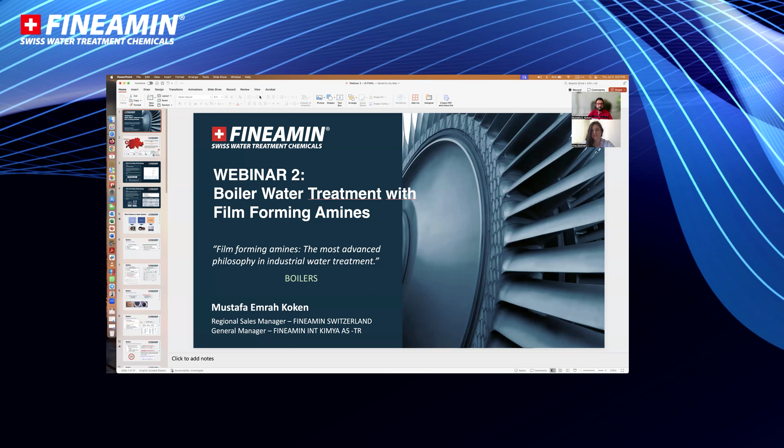And just let me start by showing you the so I think it is all clear, right?

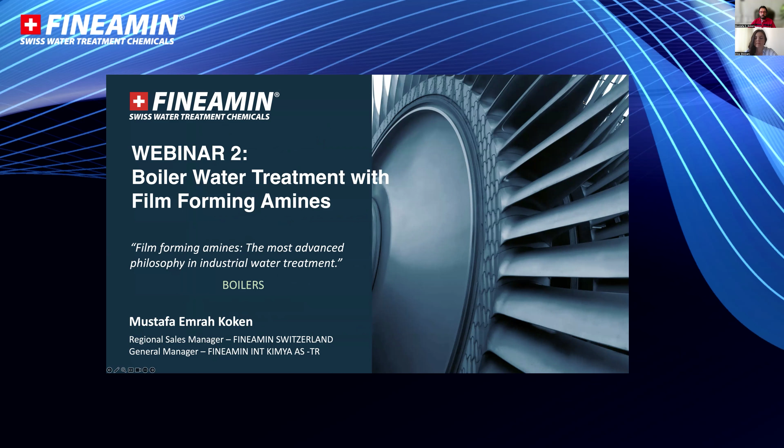So we will be giving a focus to boiler treatments, and first let me say something about our company, as Irina mentioned, and for those of you who participated in our first webinar, there will be some slides that look similar as we try to compare the standard treatment and the film-forming amine-based treatment. Once again, when I'm pronouncing film-forming amine, some people say film-forming amine, we also say polyamine, or we also say FFA. Basically we are all meaning the same.

We are a Swiss company, making our production in Geneva, and we have offices in different locations, like Germany, Turkey, Singapore, Mexico, and Brazil. Our products are produced principally in Switzerland, but we also have local production in Turkey for the Turkish market.

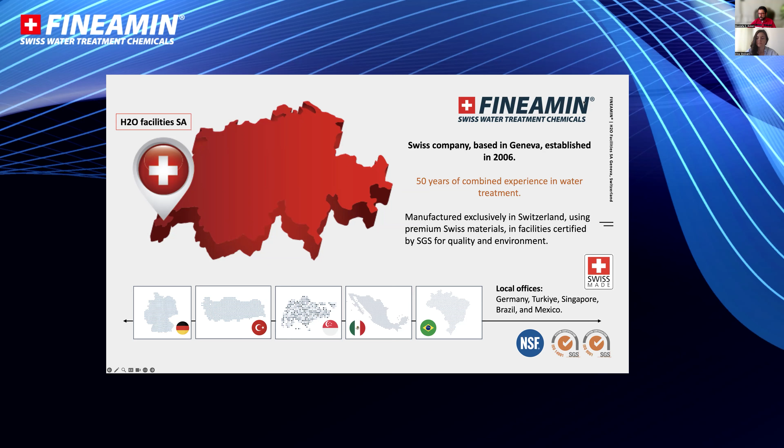This is basically a journey of more than 50 years of film-forming amine-based treatment chemicals supplied by Fineamin philosophy. As we will be taking into consideration certifications too, you'll see once again that we are certified by NSF, and also have ISO 9001 and 14001.

So let's start once again with the basic understanding of film-forming amine technology. We are talking about formation of a monomolecular film on the metal surface with hydrophobic nature. The hydrophobicity generated on the metal film, precisely the metal oxide it is adsorbed onto, will repel anything hydrophilic like dissolved gas and dissolved solids. So this will act as a continuous barrier between water and metal.

Although there is much more popularity about film-forming amine treatment nowadays, the history of film-forming amine substances dates back to the 1970s.

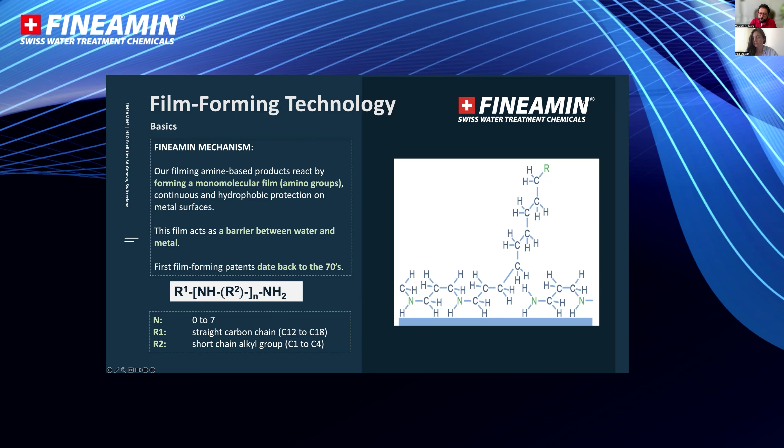For those of you interested in the molecular structure, this is a really bulky molecule with different alkyl chains, R1 and R2. The intermediate group will also define something - for example, if N is 0 and the first alkyl group is C18 hydrogen 37, we are talking about octadecylamine, ODA, one of the first known film-forming amines in history, I would say. There are more than one film-forming amine substance, and we are also using ODA in our formulations.

So the idea is seeing it from different perspectives: first, adsorption on the metal surface, followed by interaction between hydrophilic heads that is ionic, and then there will be van der Waals forces between the tails, generating hydrophobicity. Of course, that film form will not be affecting thermal exchange, so there is no contribution or energy loss because of that.

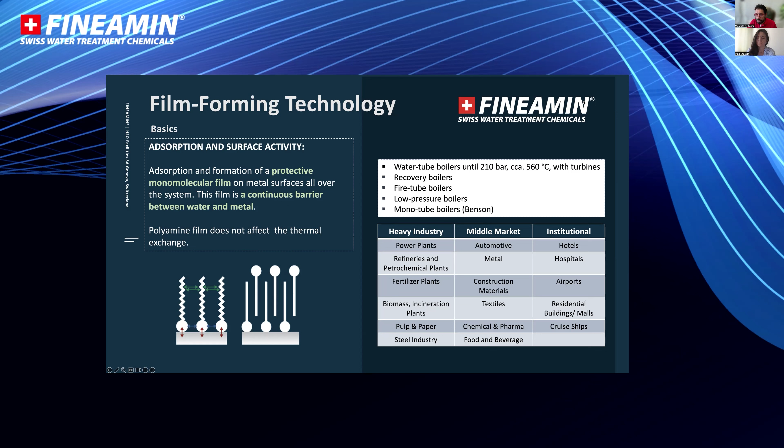In boiler applications, we are using quite a different and very wide range of places - in terms of the type of boilers, water tube boilers, recovery boilers, fire tube boilers, as well as different industries, whether heavy industry, power plants, refineries, fertilizer, middle market production, construction, textile, automotive, food and beverage, as well as commercial institutions like hotels, hospitals, airports, etc. So it is really wide applications.

When we are focusing on applications for boilers, we are targeting treatment in order to overcome problems associated with scaling, corrosion, and carryover. So these are the three technical scopes.

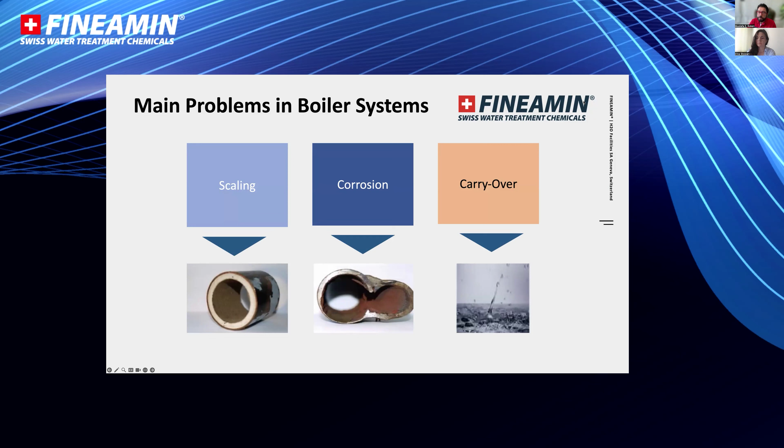Normally in traditional treatment, people are using oxygen scavengers of different types, dispersants, phosphate, ammonia, or neutralizing amine mixtures. Of course, the treatment is being selected with respect to system data, the boiler pressure, etc.

With respect to that traditional treatment, when we switch to the film-forming amine-based treatment, we are using basically mixtures - all organic one-drum solutions, and mixtures, all organic two-drum solutions, composed of different actives.

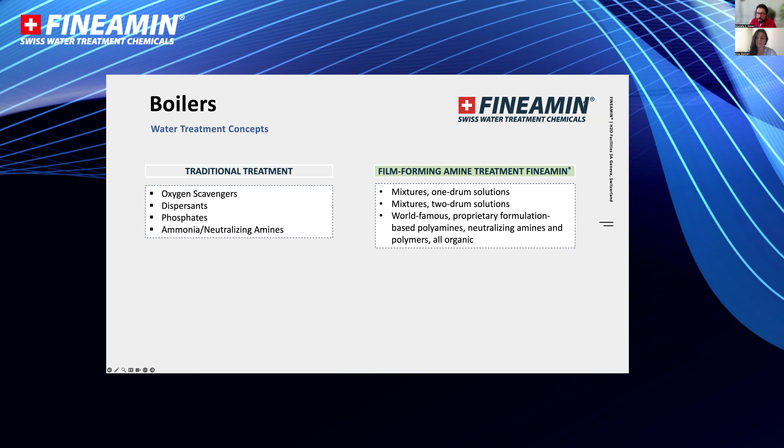So the core is film-forming amine, also known as polyamine, but of course the formulations also contain pH-boosting agents like neutralizing amines, and up to certain pressures, also polymers.

As we said during our first webinar for the boiler treatment case about the oxygen corrosion issue, we are mostly dependent, in case there is a deaerator, on the external method, meaning mechanical removal of the dissolved oxygen. At the same time, it's possible we have an economizer in case the condensate return rate is low, or for the process usage of the steam, and the steam may be becoming dirty after the return. So people just throw it away and use an economizer to heat boiler feed water.

These two methods are helping a lot because the solubility of the gases, including dissolved oxygen, is inversely proportional with the temperature. So the higher the temperature, the more oxygen we remove.

But in case of some low pressure boiler industries, there is no deaerator, which means there is no possibility to remove the oxygen mechanically, and instead we are solely dependent on the chemical.

Now, in order to get the real performance and benefit from the chemical, we need to know exactly the boiler feed water temperature. Why? Because the boiler feed water temperature directly tells us about the dissolved oxygen concentration. If we are not taking it precisely, we will not be able to read any oxygen scavenger residual.

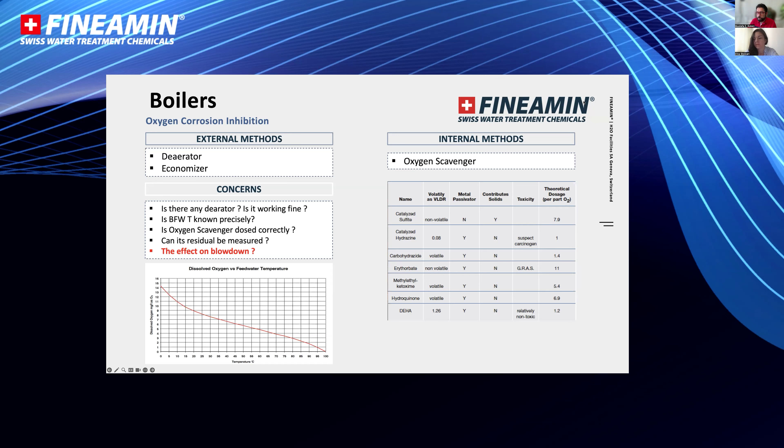So this is always a back and forth evaluation, and it gives us pain because at the end of the day, if we are unable to remove oxygen properly, we will have oxygen-related corrosion, not only in boiler feed water lines or in the boiler, but also oxygen is a gas - it will go to the steam and generate pitting also in steam and condensate lines.

So why are we talking about this? Because in Fineamin products, we don't use any amine sulfite or oxygen scavenger principally. So whether the temperature is low or high, we will not be changing the dosage of our chemical.

The most preferred internal treatment chemical is phosphate and polymer mixtures. In low pressure cases, most people are using inorganic types of phosphates. Because calcium phosphate is much less soluble than calcium carbonate, in case of any hardness slippage to the system, it will convert into calcium phosphate form that is soft and removable even by jet water cleaning.

However, for an extended precipitation of calcium phosphate over the metal surface, especially when we also have relatively higher pressures, we'll be generating problems about the heat exchange. This will generate steam blanketing, overheating of the tubes, and then tube ruptures. So at the end of the day, phosphate is not as innocent as it is thought to be.

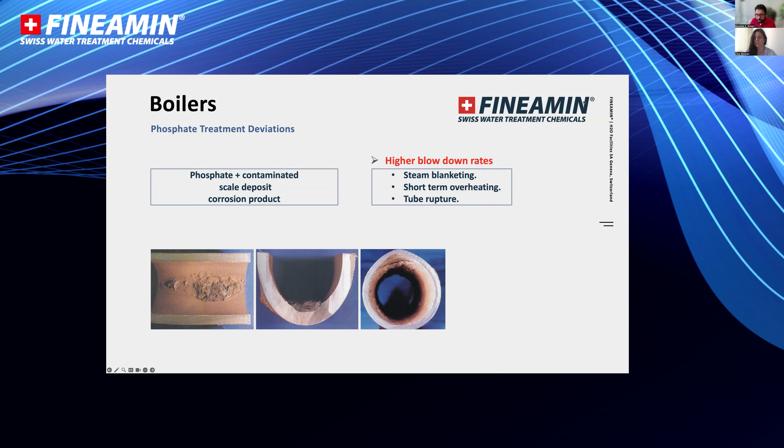And when we go to high pressure applications, the phosphate treatment is a bit more complex. We are not using trisodium phosphate or anything like this, but rather we use a program called coordinated phosphate treatment - basically two-type phosphate in correlation with the pH.

But what happens is that in case of change in load during startup conditions, or because of process demand, or if we have some refurbishment of the boilers or burners, fuel change, fuel-to-oxygen ratio change, etc., we may face a problem called phosphate hideout - meaning we are dosing the phosphate, but we are not measuring the level that we dose. This is the hideout condition, because phosphate is precipitated.

Because there is an equilibrium reaction between phosphate and pH at that instant, while the phosphate is not measured to the level that we dose, the pH is measured more than we dose. So when the return conditions happen, meaning the system is stabilized again, we start to read more phosphate than we dose because we are resolubilizing the phosphate precipitated on the metal surfaces. But because there's an equilibrium reaction between pH and phosphate, pH starts to drop. So this is really a very serious problem, and it is difficult to cope with.

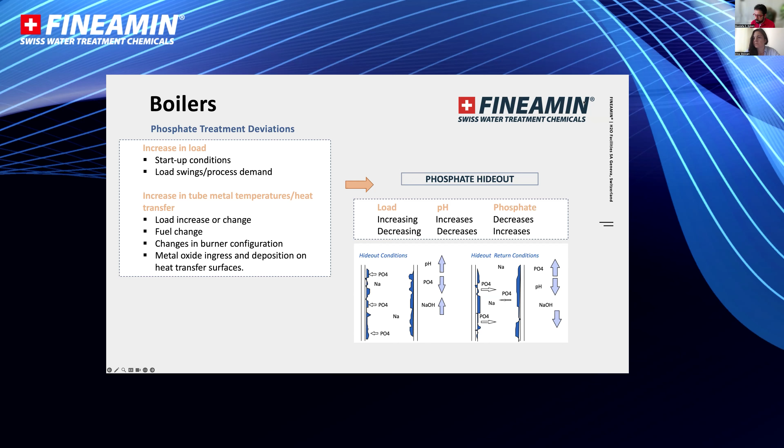Again, film-forming amine-based treatments like Fineamin do not contain phosphate. So there is no possibility of having phosphate-related issues, including phosphate hideout.

Speaking of high-pressure cases, we are talking about oxygen scavenger issues. Historically, everyone knows, and it is one of the best technically, I would say, oxygen scavenger people are using hydrazine. From the technical perspective, hydrazine also decomposes to ammonia. Similarly, people said that we also have the health issue because hydrazine is known to be carcinogenic. So we can switch into a much more innocent molecule introduced into the market probably like 20, 25 years ago.

So it is carbohydrazide. But again, carbohydrazide basically has two issues. Number one, as part of decomposition, it will also decompose into ammonia. So if we have copper and copper alloys in the system, like the hydrazine case, it will be generating issues for corrosion to yellow metals. Not only this - carbohydrazide itself is the molecule, as a passivator, to work as an oxygen scavenger too.

However, between 135 and 200 degrees centigrade, it will decompose to hydrazine. So again, we are talking about hydrazine formation in the boiler, so it is also exposure to the environment. So basically, carbohydrazide also has such outcomes and undesirable points.

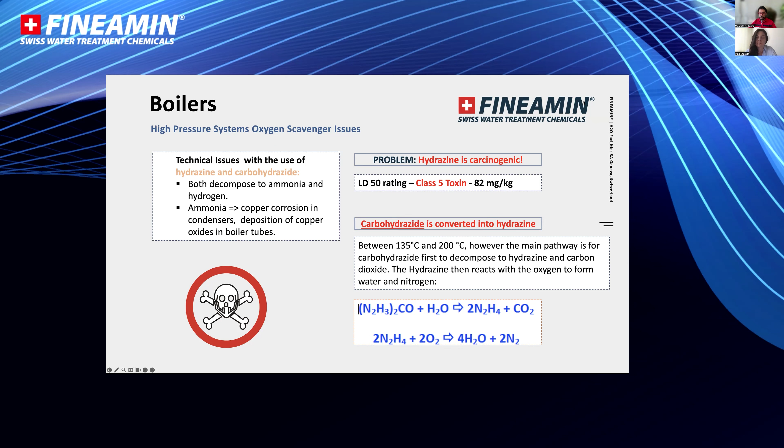So the third problem that we said about boilers is about carryover. This carryover is about steam purity. We may have mechanical carryover that is not depending on treatment chemical operation - it is mostly about the steam load and steam load changes.

However, the second carryover type, chemical carryover known as foaming, is solely depending on chemical treatment control. Especially in low pressure cases, if there is improper control of the blowdown, high pH, alkalinity build up, high levels of phosphates and other treatment chemicals, and so on, it may lead to foaming, and then boiler water in the form of small droplets will be transported into the steam lines, impacting steam purity and hence quality.

Again, why we are saying this here - because in Fineamin treatment chemicals based on film-forming amine technology, there is no possibility of chemical carryover because our chemical is all organic and contribution to TDS is extremely minimal.

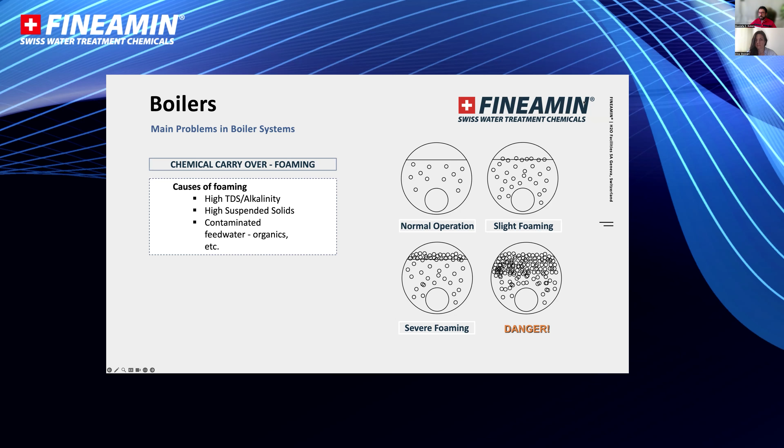So what we have been seeing as a comparison, just to give that summary again - basically no sulfites, no phosphates, no inorganic component, and no carcinogenic components. So we can ideally cycle up the boiler to the level we would like, depending on the limits of operation. We may have lower blowdown amounts, and lower blowdown means lower energy consumption, lower total water consumption, and lower total chemical consumption. So we don't have any carcinogenic, mutagenic components, so we will be fulfilling health and safety regulations for the workers and for the environment. This is the comparative study showing the positive points of Fineamin film-forming amine treatment.

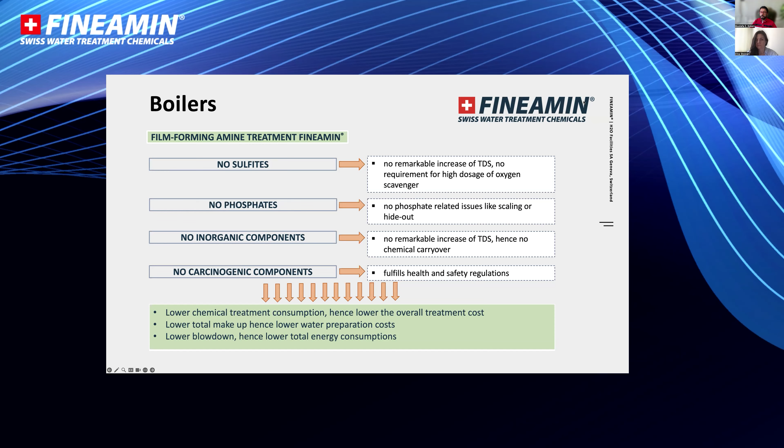So then another interesting part is about standby boilers. A customer may have more than one boiler, or one boiler with non-continuous operation. Definitely when someone is stopping the boiler, it means it has not been kept under pressure, but it is fully cooled down. So roughly within 2 days, corrosion will start. Why? Because the dissolved oxygen concentration will increase and it will attack the metal surface.

So then normally people should do the preservation. Again, the preservation is a bit different when it is up to a month, more than a month, and more than 6 months. So up to 6 months, wet preservation is possible, but up to a month, sulfite-based inorganic scavenger can be used. But if it is more than 1 month, it is not possible, because there will be too much sulfite converted into sulfate, which generates stress on the metal.

And if it is more than 6 months, we go with the dry preservation, like under the inert nitrogen blanket with desiccator inside, so on and so forth.

Now, the most interesting part of comparison for wet preservation by film-forming amine treatment of Fineamin is up to 6 days. There is no problem, and we can stop the chemical dosage, and the film formed on the metal surface will stay.

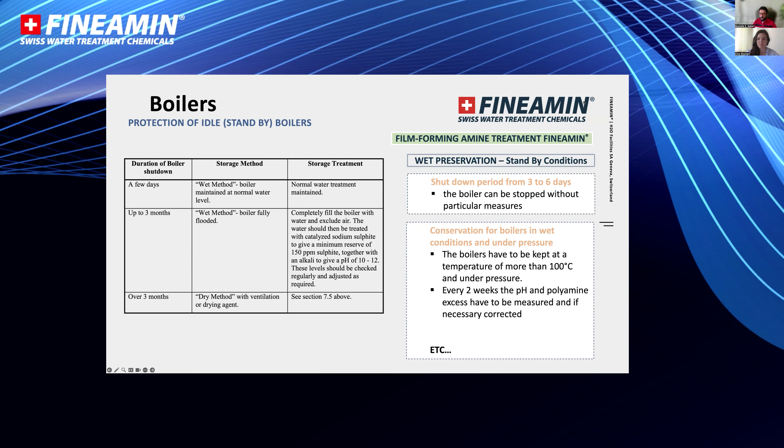And of course, when it is more than 6 days, we also have specific preservation procedures depending on the conditions of standby. However, those conditions and the chemical consumption are much more mild than the traditional method using sulfite-based preservation. So that is also another advantage of film-forming amine-based technology of Fineamin.

Now, the last part about the boiler treatment is for the boiling out. I will not go into details. This is totally a separate subject.

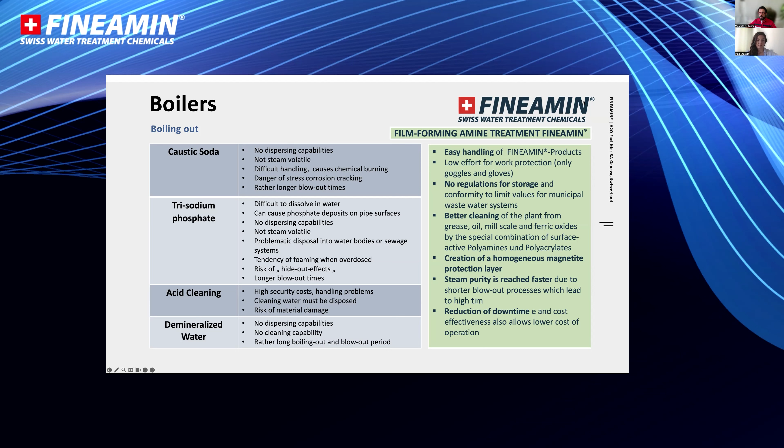However, when someone compares the film-forming amine treatment capabilities for boiling out, theoretically, we can say that it is possible to use the same treatment chemical to do a boiling out versus different options like using caustic soda, trisodium phosphate, demineralized water, sometimes acid cleaning for some people, and then definitely they have their own cons in terms of handling, storage, hazardous chemicals, dangerous chemicals, possible scaling, etc. So this is also a further application area in boiler treatment of film-forming amine treatment of Fineamin products.

Now, at the end of the day, what we are saying is that the treatment as the core philosophy has surface active film-forming amines, polyamines, meaning FFAs. But we are not talking only about the product that contains polyamines inside. We are talking about specialty mixtures that also have neutralizing amines and, up to certain pressure limits, polymeric dispersants that will really help.

And as I said at the beginning of the presentation, basically we don't need to use an oxygen scavenger. However, for certain clients, there is a key performance indicator value for dissolved oxygen.

So we are protecting the metal surface from oxygen corrosion by making a hydrophobic film that will repel dissolved oxygen, like the painting of a metal surface, I would say. But as you may understand, there is no stoichiometric reaction between the dissolved oxygen and the film-forming amine, as in the case of an oxygen scavenger.

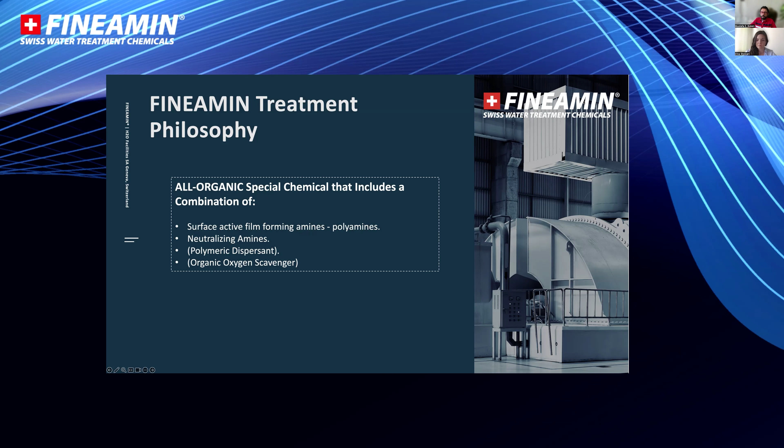So in the presence of a deaerator, the dissolved oxygen value will be at the level that the thermal deaerator can remove. So in case the client has a key performance indicator for dissolved oxygen, then we also use in certain products an organic oxygen scavenger to deal with that level. That is the only reason to have, in certain formulations, the presence of an organic oxygen scavenger.

So again, the philosophy in most cases is a single drum, because it is composed of different actives and different functionalities. But at the same time, as Fineamin, we also have a single drum of film-forming amine that we will discuss. And we also have solutions that do not contain cyclohexylamine for certain reasons, which we will discuss in coming slides.

And happy to say that for certain of our products, we have also NSF G6 or G7 conformity. So this is also about the requirements in case people are asking for direct contact with food, so on and so forth, that we can really supply.

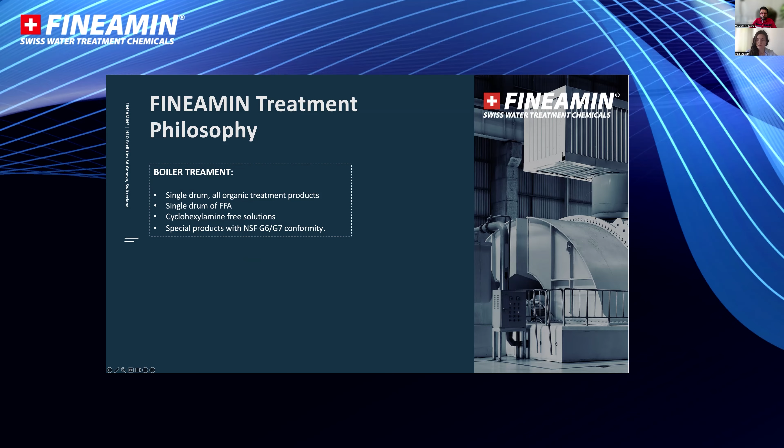So in Fineamin treatments, in specific cases like in a fire tube boiler using the Fineamin product, you can see the difference for better protective film formation and passivation. The top pictures show a client having an application of a traditional treatment, and then without any maintenance or shutdown period, cleaning and restarting again with Fineamin treatment, it was just switched accordingly. As you can see, in a course of only 6 months, there's a remarkable change.

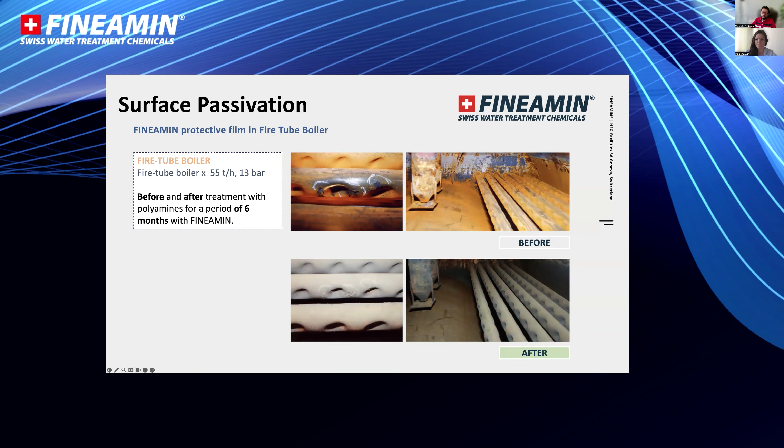And the pictures are from the same locations. You can see how the film forms and protects the surfaces. So this is a fire tube boiler.

And for the application of direct food contact cases in low pressure, again, you can see the change in boiler water conditions even after the first week, but over the course of only 3 months, you can see how it has been changing.

This has been expected because sometimes food industries have issues of seasonal work, then the steam load changes, the operation of the boiler changes, and there's an inconsistent level of oxygen scavenger because of this change of load. So the traditional treatment, unfortunately, has its own drawbacks and failures.

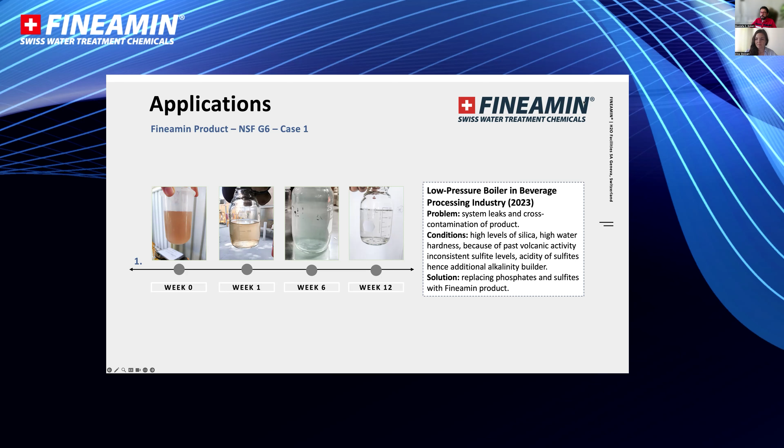While in Fineamin applications, the film is easily formed and kept intact all the time. So even for short periods of standby or changing, there will be no change of Fineamin product dosage, and irrespective of dissolved oxygen concentration, we are not changing the application pattern.

This is also true for another canned food and beverage industry, so the problems were alike. This is entirely two different applications, two different continents, but they were using local product, traditional approaches based on sulfite and phosphate technologies. When it was switched, over a course of a few months, the results improved.

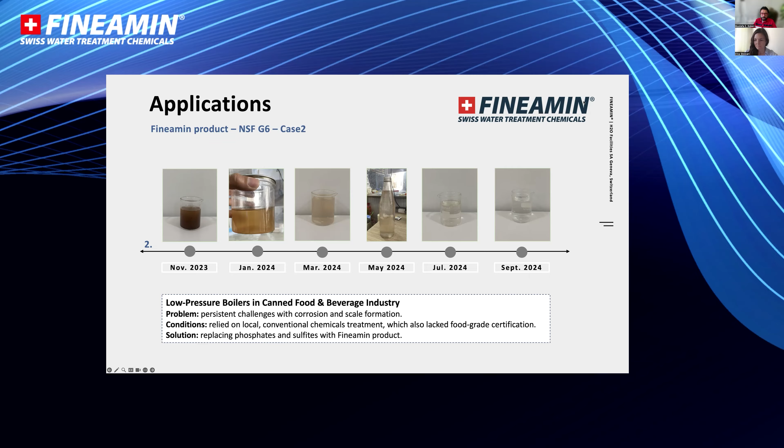That showed better protection against oxygen corrosion, also complying with food direct contact of the steam. So when we are going to higher pressure cases, like 196 bar—

In a plant, as you can see, it is 1,020 tons per hour per unit with more than 10 units. So when people using traditional treatment based on hydrazine phosphate switched into film-forming amine based Fineamin products, there is an improved structure of the magnetite.

As expected, much lower blowdown values and better dispersion, even if there was a problem remaining in the system, like some scaling and corrosion products. Through the application, those impurities started to be dispersed and removed through the blowdown.

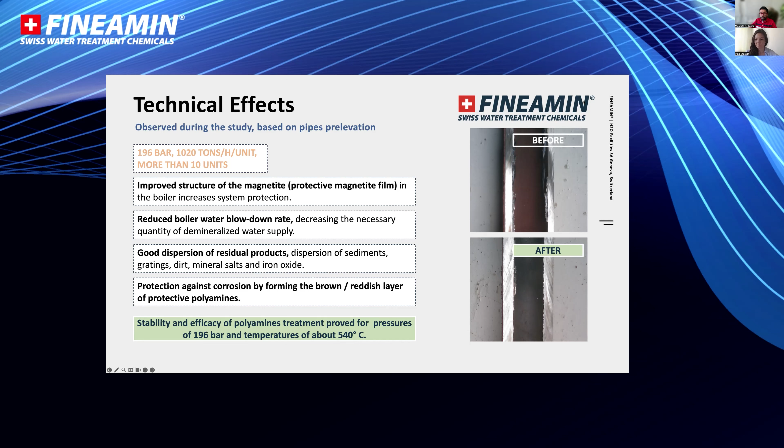So stability and efficient treatment of the polyamines is proven for such conditions as 196 bars and for temperatures as high as 540 degrees centigrade.

So it is easy to show before making any inspection, because one of the core things is when we start using film-forming amine-based treatment of Fineamin versus the traditional one, in case there is any upset, like iron oxides deposited somewhere, the first thing we see is the dispersion back. This is what we call online cleaning efficiency.

Sometimes people say, oh, we have seen a bit increased turbidity and increased iron level. This is normal because of that dispersion, but through some period it starts to stabilize, and the color starts to disappear, and any iron value that is being measured starts to decrease as well.

In this case, with a treatment that replaces the traditional hydrazine treatment, we are seeing the decrease of iron levels from 20 ppb, parts per billion, to 10 ppb. So these are also the results people appreciated on site.

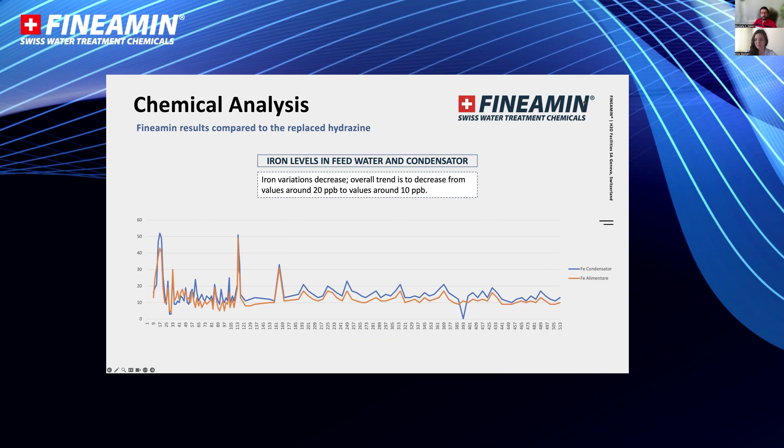The application of film-forming amine treatment, Fineamin, is not just limited to high pressure cases but also systems having steam turbines. We are talking about a better, thin, single layer, stabilized magnetite layer formation that results in better heat transfer, whereas more than one layer of magnetite blocking formation will lower the energy efficiency, raising energy costs.

So it will show again online cleaning efficiency of deposits. Let me say it one time: we are not talking about an online cleaner product per se, but because film-forming amines have dispersive capabilities like surfactants, they have online cleaning efficiency. That is the issue.

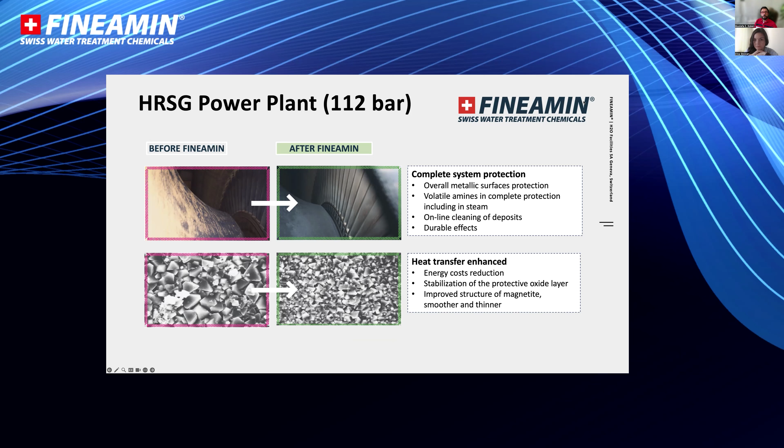Now speaking of the famous story of power plants having steam turbines, let's make further statements about the treatment concepts. One of the most well-known treatments in steam turbine power plants is all volatile treatment.

We have basically two types. One is called all volatile reducing, having an oxygen scavenger and pH control, namely hydrazine or carbohydrazide and ammonia. The other is called all volatile oxidizing, solely dependent on pH control, where the thermal deaerator efficiency is considered enough, and there is only pH control. So with hydrazine, carbohydrazide, or pH treatment, basically there are no solids added to the feed water.

So in that sense, we are not talking about phosphate-related issues either, because there's also a second type of treatment for high-pressure cases using phosphate, let's say coordinated phosphate treatment programs. But in all volatile treatment, there is no usage of any type of phosphate.

So this is preferred in HRSG systems, systems with steam turbines, because there is a parameter called cationic conductivity, or cation conductivity, or acidic conductivity, and the turbine manufacturers are seeing it as an issue.

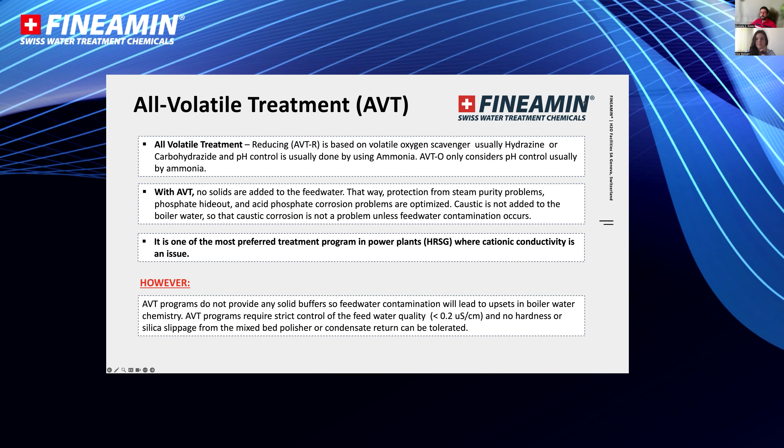Then the famous parameter that people call cationic or cation conductivity, also known as acid conductivity - what is it about? It is basically a non-specific measurement of anionic species like chloride, sulfate, nitrate, phosphate, etc. And basically in steam, such anions can generate issues on the turbine or turbine parts, blades or rotor discs.

At the same time, as you can imagine, when they are being protonated, they will form strong acids. So they will generate further corrosion issues.

This is why steam turbine manufacturers, unfortunately for chemical engineers or water treatment companies, are putting a very tight and tough limit, keeping cation conductivity less than 0.2 microsiemens per centimeter. With film-forming amine treatment like Fineamin, we are not really more than 0.5.

But again, this is more than that tough limit given by turbine manufacturers. So, unfortunately, the cause comes from the presence of neutralizing amines, because neutralizing amines also decompose into organic acids, and this contributes to cationic conductivity.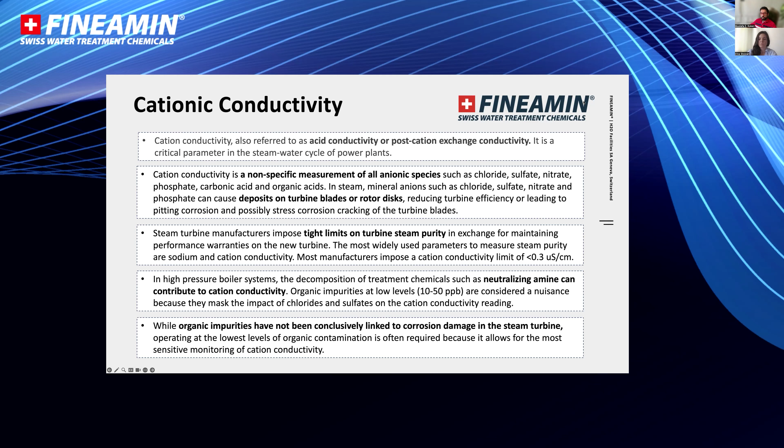So, as we said, ammonia and hydrazine don't have any contribution. This is why all volatile treatment is one of the most preferred treatment philosophies for steam turbine containing systems.

So all the neutralizing amines, whether cyclohexylamine, morpholine, diethylaminoethanol, or monoethanolamine, they all contribute to the cationic conductivity. And basically, cyclohexylamine is one of the highest contributing amines in that sense.

As you may know, carbon dioxide also has that contribution, but it is considered like a noise, a false contribution. So if someone degasses the sample before measuring it, they can remove the effect coming from carbon dioxide.

Now, these are the points about all volatile treatment and cationic conductivity. But at the end, people should really, when using all volatile treatment, carefully balance the necessity of having a good pH - boosting the pH - and the delicate equilibrium between corrosion control, especially if there is copper or copper alloys in the system.

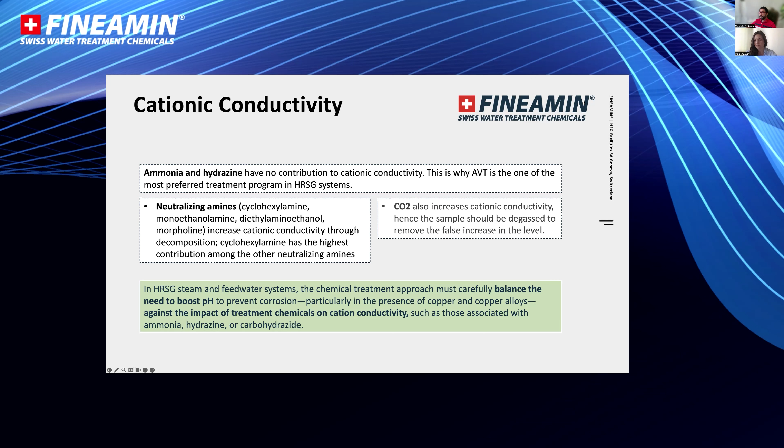Because at the end, ammonia, and hydrazine decomposition to ammonia, will affect and generate corrosion on steam turbines. So speaking of cyclohexylamine, as we said, like other neutralizing amines, it contributes to cation conductivity.

In addition to this technical point, there is another concern, and frankly this is a bit unproven - I'm sure everybody agrees there should be more research and development and investigations done. But there are some health and safety concerns, like repeated long-term exposure may generate issues in kidneys, livers, and maybe some issues about reproductive and fertility systems in animals, so on and so forth.

So we should also mention the positive points of cyclohexylamine, because it is widely used in many chemicals, being a solvent and an organic solvent, and is a chosen industry standard neutralizing amine in many formulations. Because of its high distribution ratio and high basicity, it is really an industry standard chemical.

In addition to that, despite those unproven concerns, it is still on the FDA approval list - that is 173.310, boiler water additives for steam contacting directly the food, except the dairy industry. So the bottom line: it is still FDA approved, and there is no global ban.

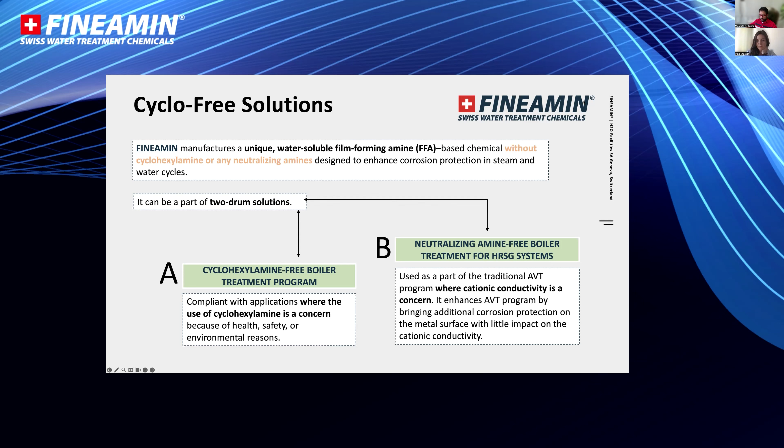The last part we would like to say is also the possible automation for the Fineamin AT series produced by Fineamin. Basically, they contain a fluorescein molecule, a traceable molecule, that can be traced easily through the same pattern of monitoring and dosing the chemical automatically. So this is already present in our chemical portfolio.

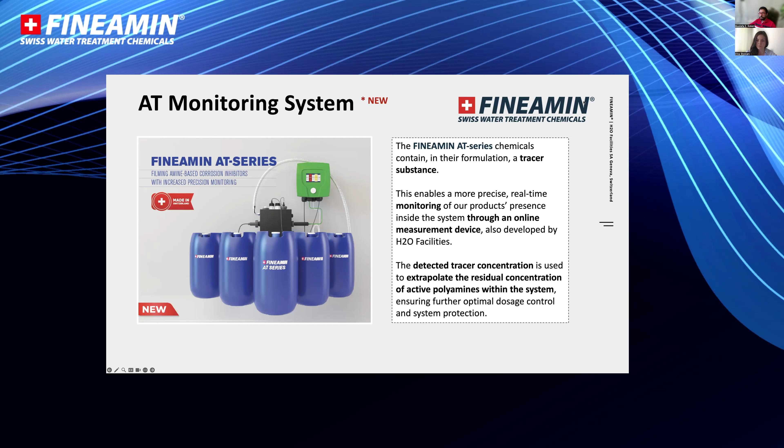So in case people are using it, you may ask how we will be detecting the fluorescent molecule. It will be detected basically in boiler feed water, and it will be dosed in accordance with that. But this is further automation and know-how from Fineamin company.

The analytical control, the measurement of the residual, traditionally can be done through titrometric way, as you see in the Heyl test kit, as well as spectrophotometric way. Traditionally, it is the Rose-Bengal method. So I would open a parenthesis into that.

We make our own reagents for this, but at the same time, Dr. Lange developed specific reagents in accordance with the Rose-Bengal method, and made measurement of the film-forming amine standard in their own spectrophotometer. Similarly, there is also another US company, CHEMetrics, which produces a different type of method for the detection of film-forming amine.

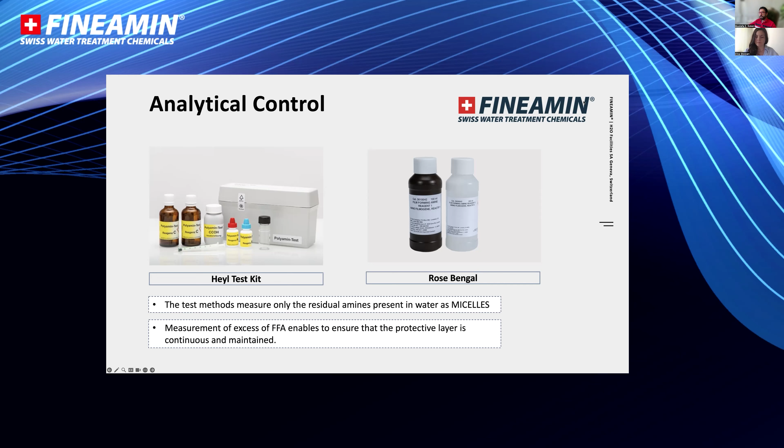Basically, all the methods are looking to measure the free residual, not something extracted from the film formed on the metal surface, but something free that we are keeping in the system.

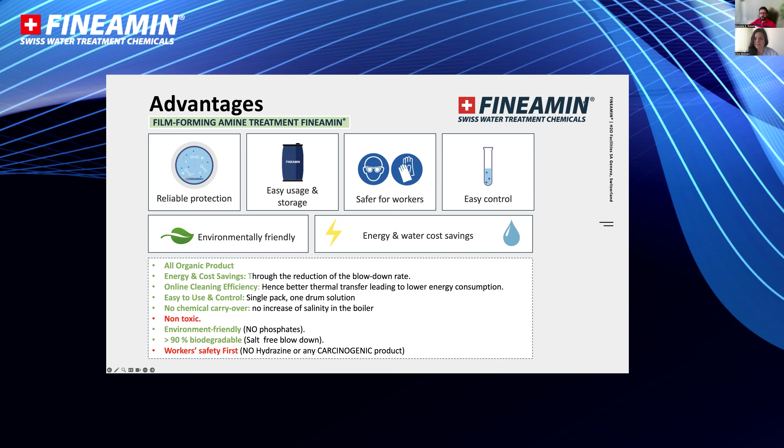To wrap up, we are talking about a very reliable, sophisticated, easy, safe usage of a Fineamin film-forming amine treatment with different scopes, single drum or multi-drum solutions, but at the end, all organic, no contribution to TDS, no phosphate or sulfite or inorganic content, eliminating all possible issues related to dissolved oxygen levels or phosphate-related problems, and beyond that, non-toxic, environmentally friendly, more than 90% biodegradable, and not having any hydrazine or carcinogenic active inside.